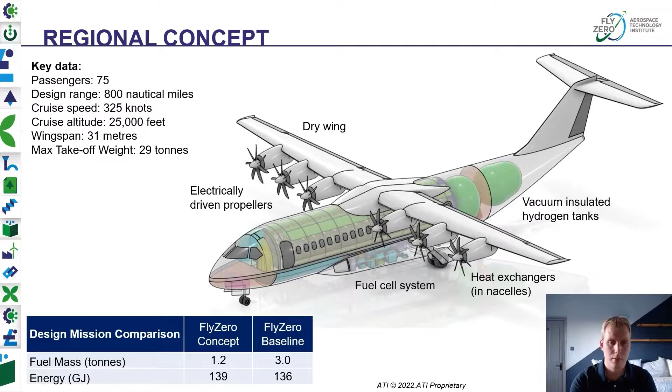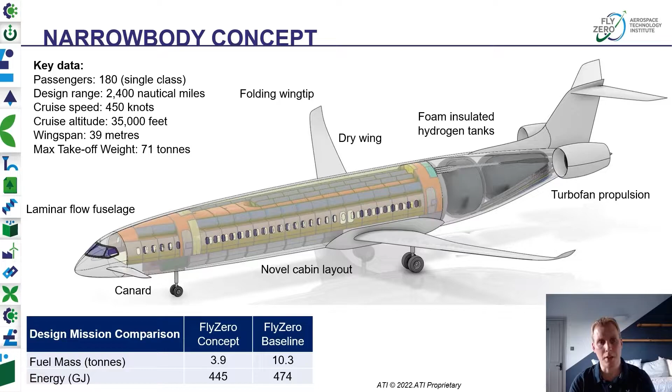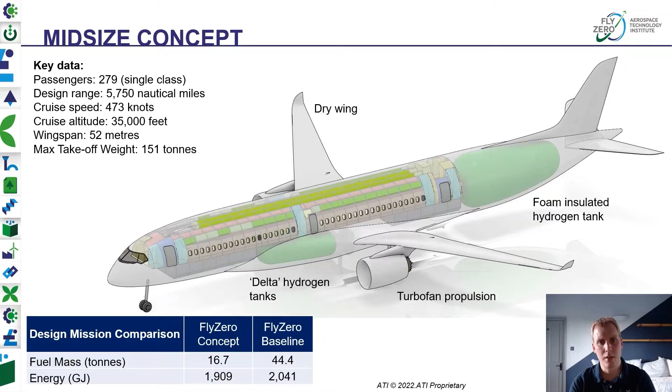So in terms of the conclusions, what have we learned from this concept activity? Well, as I said earlier, the concepts are 3 possible solutions that the FlyZero project has come up with.

The hydrogen storage dominates the choice of architecture. Where do you put various systems? You start with the hydrogen storage because of the volume challenge that's associated with hydrogen.

We've discovered that flight operations with hydrogen are fundamentally different. The shape of the payload range diagram, the ability to trade fuel for range, which is a given on kerosene aircraft and something we're all used to, doesn't exist in the same way.

The concepts are based on the FlyZero technology projections, and we should note that they are therefore sensitive to changes in things like the efficiency of the hydrogen storage.

Safety is another critical consideration. We've designed these concepts using FlyZero design principles which were derived by the project, things like we have to keep the hydrogen storage outside of the uncontained engine rotor failure zones.

Currently, the hydrogen regulations don't exist that would be needed to bring one of these aircraft into service. Global cooperation is going to be needed on this. This represents an excellent opportunity for the UK CAA to re-establish itself as a global player in the regulation space.

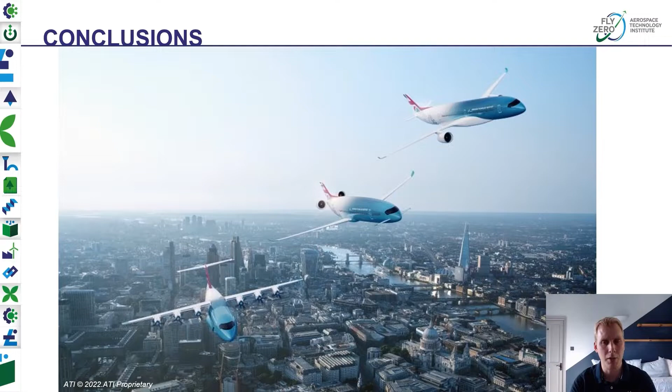Hello, I'm Simon Webb and I'm the Chief Engineer for Propulsion on FlyZero, and I'm going to give you an overview of the technology options and challenges we've been working on over the last year.

So firstly, as I explained in the last webinar, and as we've now documented in our zero carbon fuel comparison paper, we've down selected to liquid hydrogen as the preferred fuel for zero carbon flight. The main driver here is that as well as producing no CO2, hydrogen is very light. It's around 3 times more energy dense than kerosene, which is a key dominating factor for aerospace.

However, when it's a gas, it's very large. It has low volumetric density. This does improve when it's liquefied.

However, this presents a key first challenge in that hydrogen is only liquid at very low temperatures, at around minus 253 Celsius or 20 Kelvin. So significant work is needed to create a cryogenic tank and fuel delivery system to be able to make this viable for aerospace.

Hydrogen is also a very small and energetic substance, so there's additional challenges around sealing at joints, leakage, and potential permeation over time into materials.

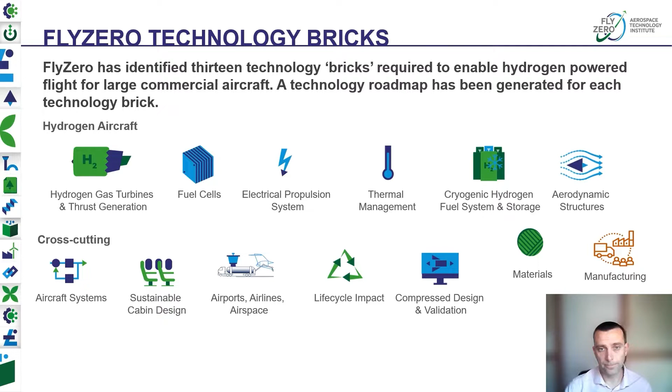We put these technologies into our FlyZero concepts, as was talked about earlier, and have been considering what would need to happen in order to make these viable in the future.

On aerodynamic structures, there's a continued need to look at increasing the efficiency whilst reducing the mass of these structures. For example, in developing efficient, lightweight dry wings, as the cryogenic fuel will no longer be stored in the wings. The fuel will be stored in the fuselage, as these tanks need to be large and ideally as close to spherical as is practical in order to keep them lightweight from a structural and thermal sizing point of view.

Also, making these tanks from composites in the future could offer a significant advantage, so we think this is an area to look into and develop further.

There are significant new challenges with a cryogenic fuel delivery system. We've looked at knowledge from other industries, such as the space industry, but there are many different requirements for aerospace, particularly around the conditions that the fuel would be stored at, the requirements through life, the manufacturing rate and life cycle cost that aerospace requirements present.

Gas turbine technology looks attractive, and so we're advocating investment in this area in the future, particularly around the combustion system and the development of a fuel delivery system with heat exchangers within the gas turbine. Our studies show that it would be viable to make a hydrogen gas turbine more efficient and produce less NOx

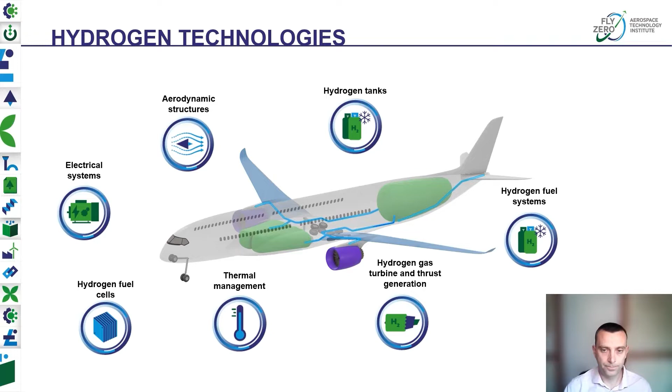So I talked about what would be needed to introduce liquid hydrogen fueled flight. This, however, would clearly require a new clean sheet aircraft design and significant investment in the ground infrastructure to go alongside that. So we're advocating multiple routes to decarbonise aviation in the future.

Including liquid hydrogen, but also continuing to look at the production and use of sustainable aviation fuels from existing feedstocks, biofeedstocks, waste feedstocks of greases, oils in the future. But looking long term at the scalable solution of power to liquid SAF.

So using hydrogen and CO2 extracted out of the atmosphere, going through a Fischer-Tropsch process to produce that fuel with increasing blends with kerosene. This would require investment in the today relatively immature direct air capture of CO2 from the atmosphere, and that would need to be scaled up and made economic.

We need to continue to invest in improving aircraft efficiency, both in terms of making it lightweight and the fuel efficiency of future aircraft. Across different fuel options, kerosene, SAF and hydrogen, for different reasons, we think there's a significant risk the cost of producing these fuels and the price of these fuels ultimately will increase in the future.

We also think there's a place for improving flight path management in terms of making flights efficient, minimizing waiting times, etc. But also from a sustainability point of view, progressing the technology in weather path predictions, and so minimizing the time over which flights would travel through supersaturated regions where persistent contrails are at a higher risk of being formed.

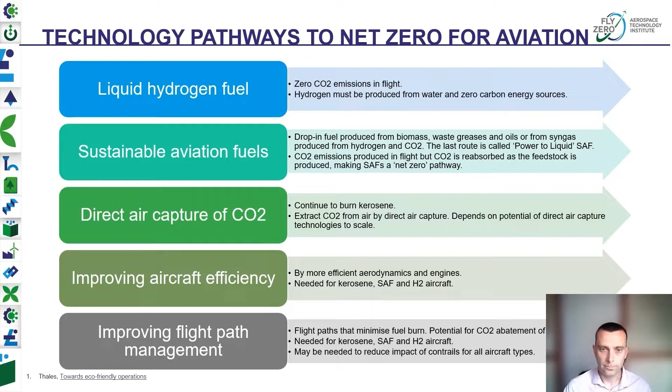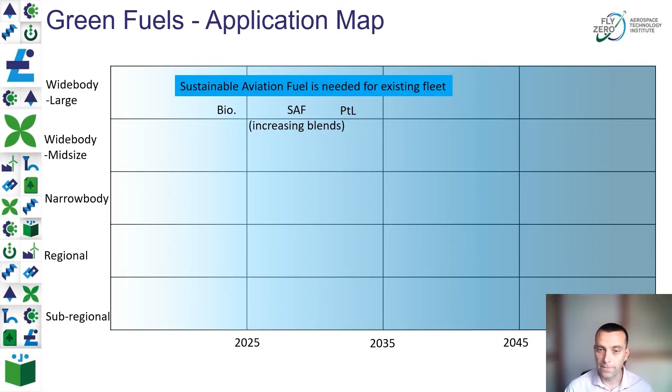So looking forward at where green fuels could help decarbonise aviation across time and across the different capability spaces, there's definitely a place for sustainable aviation fuels, and that will be needed for the existing fleet with increasing blends going forward. But alongside that, we believe there's a space for electric battery powered flight at the shorter, smaller range aircraft,

and then going up to, in the medium term, gaseous hydrogen fueled flight, and then building up to long term as you need to go further and will want to have larger aircraft flying with green fuels, moving towards liquid hydrogen. This will, however, require significant investment in onboard technology and in ground-based infrastructure in producing the fuel and around airports.

If early flights happen with gaseous hydrogen, we think that would be a great starter in terms of starting the conversation with airports around handling hydrogen as a fuel, and with the authorities around the suitability of regulations and certification criteria and acceptable means of compliance, and driving that conversation forward for the long-term move towards liquid hydrogen as a

fuel. And as a new fleet is introduced, we think strategically liquid hydrogen will be the best option for the vast majority of the aircraft sectors. Fuel costs will drive it that way, and the need to have an improving aircraft capability.

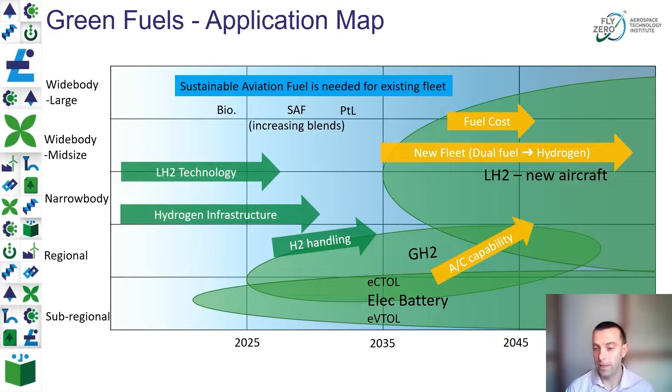Overall, we think there's a place for power-to-liquid SAF and liquid hydrogen, and that these together can address the vast majority of the market, and that liquid hydrogen as a fuel has the potential to be energy efficient and a relatively economic fuel.

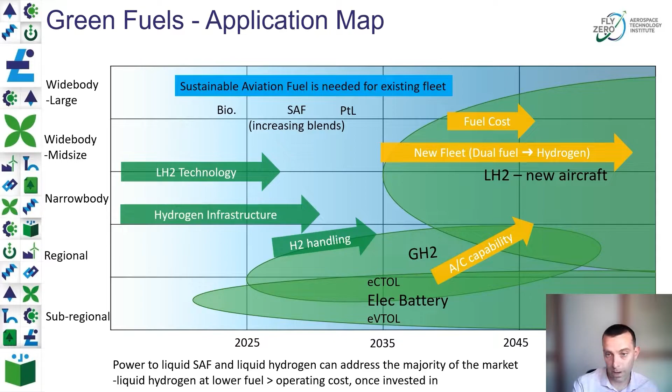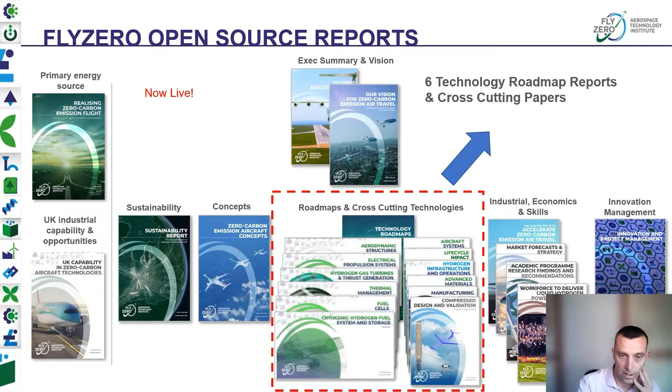So if you'd like to know more, the ATI website with the FlyZero reports is now live. Feel free to go and look at these technology roadmaps, the cross-cutting papers, and all of these other reports that are now going live on the website. Here's an example of one of the technology roadmaps to show you how these will look and feel, and what level of detail would go into these.

We'll have several of these roadmaps throughout these reports, and the target here is to drive action to have technology ready to be committed into a new aircraft in 2025, to take that forward and be developed through a development program ready to go into service in the 2030s.

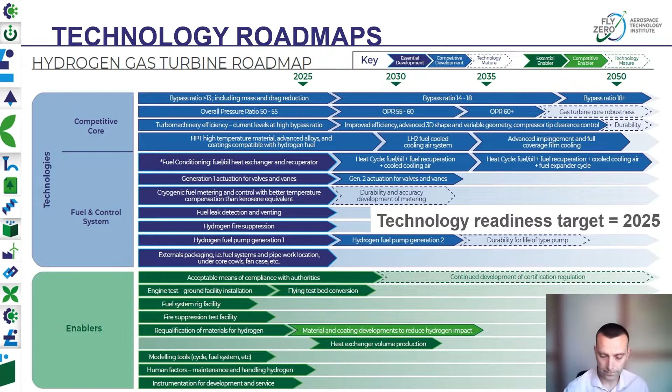So to summarise, green liquid hydrogen presents a pathway to decarbonise aviation. We believe it's a preferred fuel for aerospace because it's relatively energy dense, and this is important. It's relatively energy efficient to produce, so this makes it economic, and will also reduce the carbon footprint of the full value chain of producing the fuel and using it on board, minimising the demand on the green power generation network in the future.

This presents a step change for technology in terms of development of and maturing these new technologies. So significant investment and action is needed.

In FlyZero, we've assessed and studied the technology challenges here. We've seen no hard blockers, but we recognise substantial investment and action throughout industry and the research network is required to make this real. The UK needs to accelerate to keep pace with what's happening around the globe, and needs to collaborate. No one country, no one company can do this on their own. So we need to work together for the good of the industry and the planet.

FlyZero is now publishing our technology roadmaps and reports. If you'd like to know more, go on the ATI website, look at those roadmaps and reports. Also, if you're particularly interested in the technology, look out on the 22nd and 23rd of March for these technology talks. Please register, sign up and join these sessions to learn more.

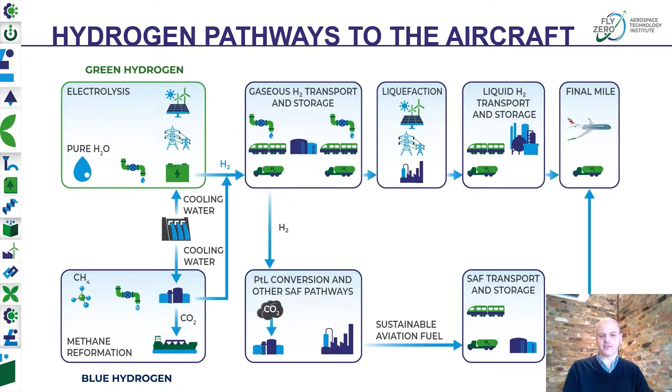So we identified and assessed three main pathways for hydrogen supply to airports and aircraft. In scenario 1, hydrogen is generated off-site, most likely close to sources of renewable energy and other industrial hydrogen users. Hydrogen is also liquefied off-site before being transported to the airport in tankers as liquid hydrogen and then stored on site at the airport. In the second scenario, hydrogen is still generated off-site in similar locations to scenario 1.

However, instead of being transported as a liquid in tankers, it's delivered as a gas via a pipeline. Once on the airport, the gaseous hydrogen is liquefied on site. And finally, in the third scenario, both electrolysis and liquefaction are carried out on the airport, with the airport only needing to be supplied with electricity and water to generate the hydrogen.

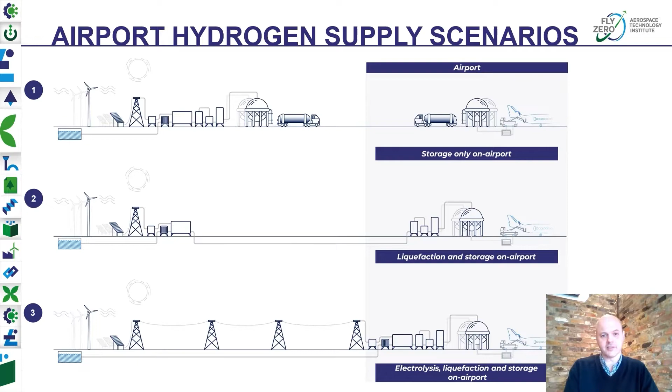As we start to look at these in more detail, through undertaking case studies at UK airports, we've evaluated which scenarios would be the most appropriate for airports of varying sizes. In the early years of hydrogen adoption, most airports would be likely to adopt tanker deliveries, as shown in scenario 1, as this requires the least capital investment and is relatively easy to scale as demand grows.

However, as the demand grows further, particularly at large airports, the logistics of tanker deliveries could become a challenge. For example, at large airports, our studies have shown that by 2050, nearly 500 tanker deliveries a day could be needed.

At these levels, we expect scenario 2 to become far more attractive, requiring a gaseous hydrogen pipeline and on-site liquefaction. Although this requires significant energy, in the context of the overall energy transformation required by 2050, this may be achievable. However, with the exception of very small airports with low demand but plenty of renewable energy, we're not expecting scenario 3 with its on-site electrolysis to be a preferred option.

For example, for a large hub airport, our studies showed that electrical demands could be well over 4 gigawatts by the year 2050.

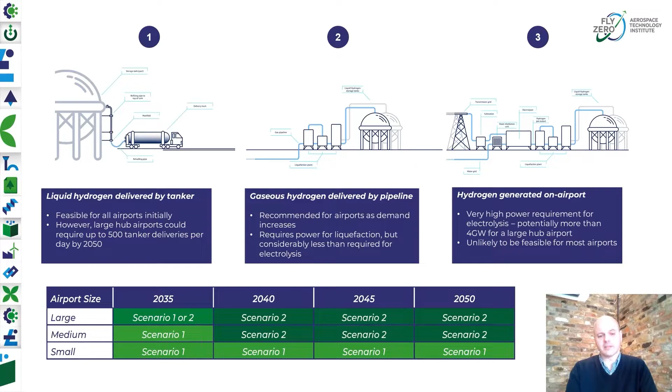So as well as the supply to the airport, we also evaluated the on-airport distribution of liquid hydrogen to the aircraft. Similarly to the supply of hydrogen to the airport, we expect that refuelling using mobile bowsers will be the most likely solution at low demand levels and for small airports on an ongoing basis. Although similar to existing bowser refuelling using kerosene, the operation would, however, be more challenging due to the requirements of maintaining the cryogenic temperatures.

As demand levels increase, airports may need to consider hydrogen refuelling systems to avoid an unmanageable bowser operation. Like the supply to the airport, the need to move away from tankers and bowsers may come sooner for hydrogen operations due to the increased volume of liquid hydrogen required when compared with kerosene.

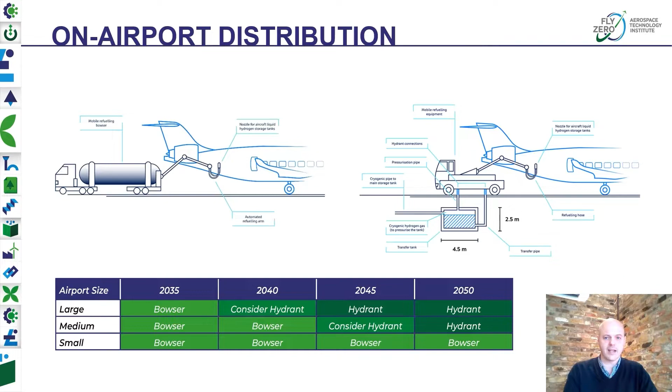The hydrant system may be similar in layout to a conventional fuel hydrant system. However, to keep hydrogen as a liquid will require cryogenic pipelines and a far more complex overall system, potentially including liquid hydrogen transfer tanks located on or underneath the apron stands.

So after looking at the supply of hydrogen to the aircraft, we then also investigated the potential impact of hydrogen refuelling on the speed of the aircraft turnaround at the airport. For airlines, the fast turnaround of aircraft is essential to achieve high utilisation and a commercially viable schedule. To maintain very fast turnarounds, often refuelling takes place simultaneously with other aircraft servicing activities.

However, due to the uncertainty of refuelling with liquid hydrogen, there's a possibility that no other activities can take place while refuelling is also being carried out. The chart on this slide shows, for each of the FlyZero concept aircraft, how the turnaround times will compare with turnaround times for similar current aircraft.

For each concept aircraft type, shown in a different colour, the column to the left of each shows how long a turnaround could take if no simultaneous activities are allowed during refuelling. In each case, you can see that this exceeds the current minimum turnaround times, which are reflected by the grey bar.

The second column for each aircraft shows that if some activities do take place simultaneously, the turnaround is close to that of the existing aircraft, albeit still slightly longer. The final column for each aircraft shows that with simultaneous refuelling, it may be possible to match current turnaround times.

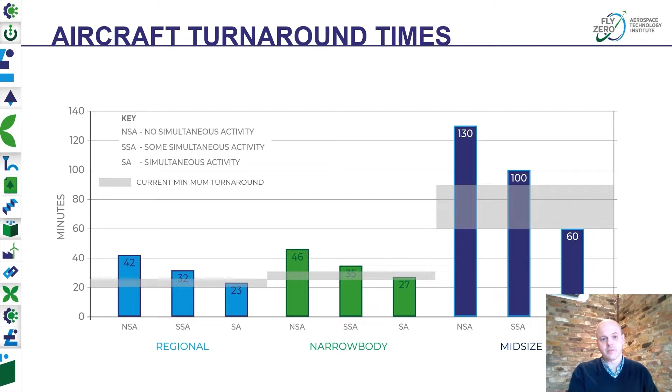So using the narrow-body aircraft as an example in green, with no simultaneous activities, in this scenario, which is based on a set hose size and refuelling velocity, the estimated minimum turnaround time is shown as 46 minutes. If some simultaneous activities are allowed, this is reduced to 35 minutes. And when there's no restriction, then the minimum turnaround time could be reduced to 27 minutes.

The reason for this concern over whether simultaneous activities can take place is due to the potential for much larger refuelling safety zones. Current refuelling with kerosene requires a 3-metre safety zone, which allows for most other activities to take place at the same time, whereas with hydrogen refuelling, this safety zone could be much larger.

However, studies for FlyZero by the HSE have indicated that while a 20-metre safety zone may be required during connection and disconnection of fuel hoses, it might also be possible to reduce this zone to 8 metres during the refuelling process. This would allow some simultaneous activities to take place.

To further reduce the impact of the increased safety zone, it's also anticipated that some of the turnaround activities would need to be automated to reduce the risk to individuals. In addition, refuelling hoses for hydrogen are likely to be larger and heavier due to their insulation materials. Therefore, some level of automation of the refuelling process may also be required. But subject to further analysis, through process changes and automation, we think that the overall turnaround time may remain broadly similar to the current process.

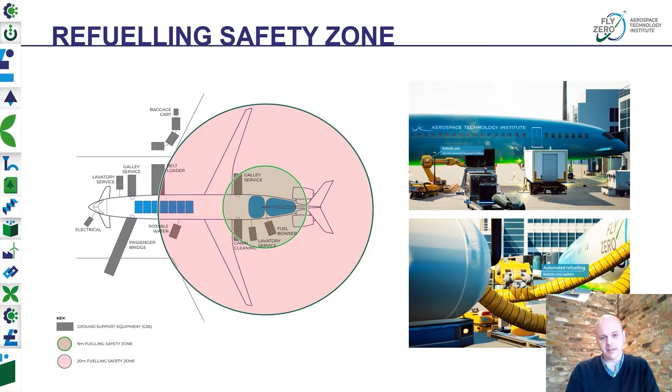As well as the aircraft's operation on the ground, FlyZero has also investigated air traffic management operations to understand the ability of ATM to support and enable zero carbon emission aircraft. An important finding so far has been that the current FlyZero concepts have similar airspace requirements to existing aircraft and don't display any attributes preventing them from integrating within the ATM system. However, regardless of hydrogen aircraft, changes are needed in how airspace operates. Without changes to airspace, the current system will be unlikely to cope with forecasted traffic volumes in the coming decades.

There are various solutions proposed to introduce technological and operational changes. By 2050, these improvements are estimated to improve flight efficiency and reduce CO2 emissions by 6 to 10%. But importantly, focusing on the hydrogen aircraft, these same changes will reduce the requirement for liquid hydrogen and the corresponding energy to produce it.

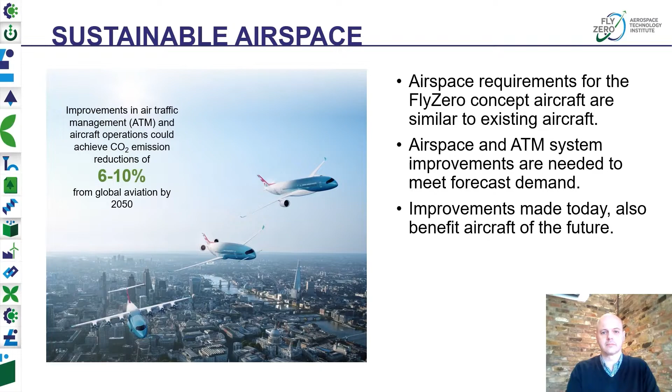To help improve flight efficiency, and therefore reduce the demand for fuel and eventually hydrogen, typical measures include optimizing flight paths in free route airspace, optimizing processes such as collaborative decision making between airspace managers, airport operators and airlines, and optimizing technologies and concepts such as high resolution weather data for headwind and contrail avoidance, and formation flying. While each initiative alone may have a small impact, the sum of these marginal gains can provide much more significant benefits overall. Understanding these gains and facilitating their implementation will be an important step towards shaping more efficient airspace, ready for future hydrogen aircraft.

Although these slides have only given a very brief introduction to some of our work for FlyZero, more information is included in our report, Hydrogen Infrastructure and Operations, which is available on the ATI website.

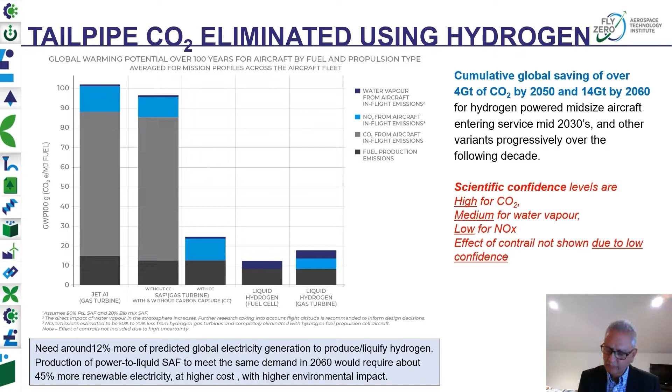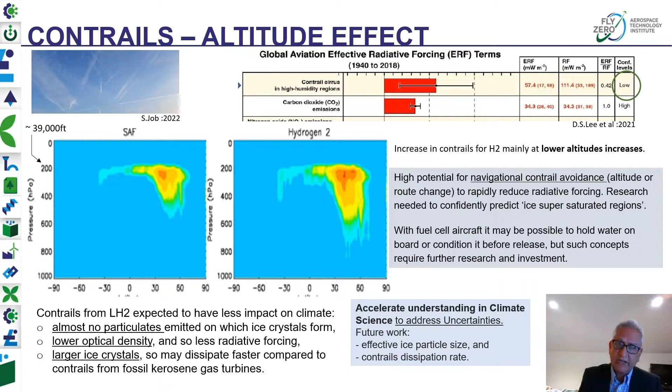To complete the picture, we also looked at other non-CO2 effects. On oxides of nitrogen, we estimate that this will be 50 to 70% less for hydrogen-powered gas turbines compared to today's technology, and fuel cells don't produce any NOx. Regarding particulates, because there's no carbon in the hydrogen fuel, there won't be any soot, but we may get a very small amount of trace lubricating oil seeping from engine seals, which might generate some particulates. Regarding sulfur, there won't be any oxides of sulfur, which today comes from the sulfur that exists in the Jet A1 when that is processed.

Now, earlier I mentioned that hydrogen combustion will produce 2.6 times the amount of water in the exhaust. So we've also looked at the direct impact of water vapor, which can act as a greenhouse gas. This is important in the stratosphere, above the tropopause, where large commercial aircraft will fly into, particularly during winter months when the tropopause is lower down. The good news is that FlyZero concept aircraft are anticipated to fly at the same altitude or slightly less than current aircraft. The total climate impact from this water vapor is around 2% of the 2 to 3.5% of total aviation impact. But even so, further research is recommended here also.

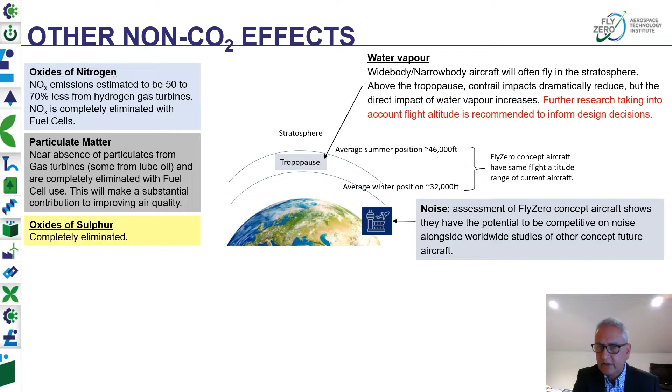Now, on noise, our work with Southampton University indicates that FlyZero concepts will be competitive on noise compared to other future aircraft, and will be able to meet the next global noise standard following Chapter 14. That's good news.

Finally, as part of the full life cycle analysis, we also looked at the environmental impact resulting from materials, manufacturing, and the maintenance of aircraft. Although this is around 1% of the impact relative to emissions from the use of the aircraft in service, we wanted to make sure that we identify opportunities where the carbon footprint may be further reduced in the future.

FlyZero concepts will require new and novel materials and processes. So it's important that productionization and supply chains build best practices to improve circularity for new technologies such as cryogenics, fuel cells, and the like that will be needed for the next generation of aircraft. This is recommended through deploying design for sustainability methods, all the way from raw materials through to end of life.

By the way, a comprehensive list of materials and processes are covered in our reports, including work we did with Strathclyde University on this important topic.

So, to wrap up, our work on CO2 and non-CO2, backed up with a full life cycle analysis, gives us confidence that the use of hydrogen on the proposed FlyZero concept aircraft can help to truly decarbonize aviation. The sooner this is done, the sooner we can realize significant CO2 reductions and thereby contribute to not only the UK net zero goal for 2050, but all across the globe.

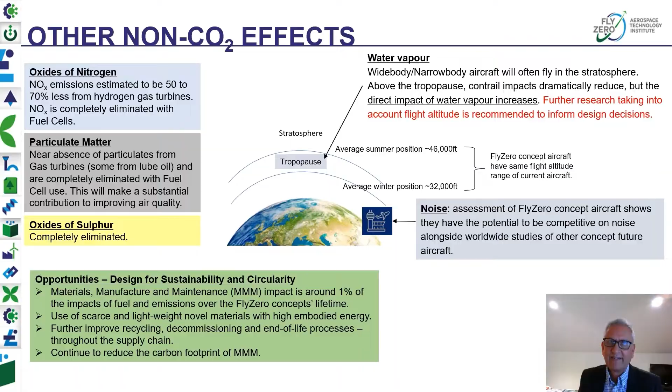Good afternoon. My name is Mark Howard, and I have had the pleasure of heading up the commercial strategy team for the FlyZero project. I'd like to take you through a whistle-stop tour of our market forecast, the options for exploitation of zero carbon aerospace technology, and a view of the economic reasons for acting.

FlyZero has undertaken a detailed market study and determined a global market forecast. The baseline forecast broadly matches that of Airbus and Boeing, issued in Q4 2021. But we've also taken an additional, more conservative view, looking to account for an incomplete recovery from the COVID pandemic.

This more conservative view actually aligns well to the Oxford Economics analysis, which was undertaken by IATA, and in summary, delays the market by approximately 5 years. However, all of the market forecasts show a market that is due to more than double over the next 20 years.

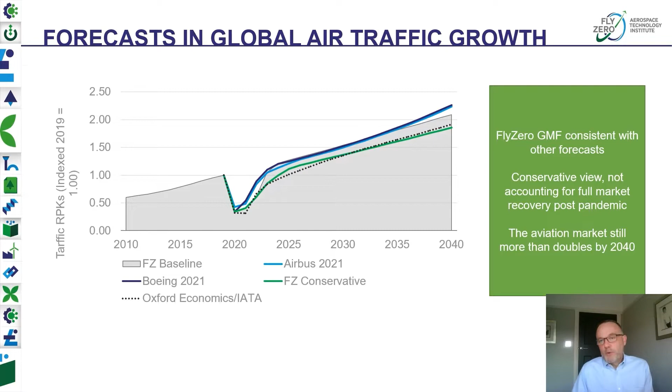For the market forecast, we've broken the market down fairly traditionally, but provided a distinction for the mid-size aircraft as a 200 to 300 seat wide-body aircraft with a scheduled sector distance of up to 5,250 nautical miles. The narrow-body, mid-size and wide-body segments collectively accounted for 93% of CO2 emissions in 2019 and are projected to account for 96% of CO2 emissions from aviation in 2050.

Now, the aviation sector emitted 920 megatons of CO2 in 2019. And if we do not act with zero carbon emissions aircraft or high volumes of sustainable aviation fuels and direct air capture of CO2, this will grow to 1,540 megatons of CO2 in 2050.

So let's put this into context for the UK. Assume that other CO2 emitting sectors act and aviation doesn't. Aviation is likely to account for 39% of the UK CO2 emissions in 2050, which will not be acceptable socially, nor, we believe, economically, as restricting aviation will hold back the economy.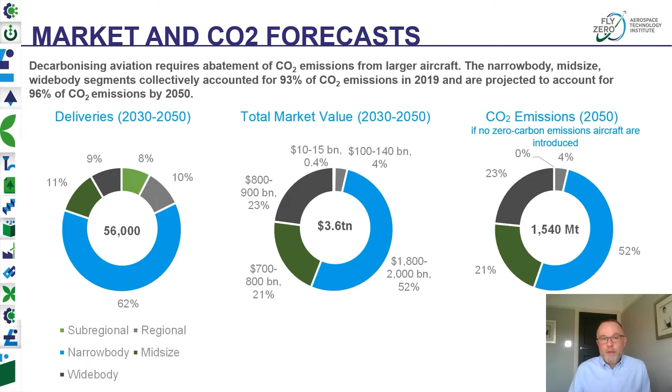Whilst the project was not asked to look at sustainable aviation fuels or SAFs, one of our primary considerations was to assess the future cost of fuel to enable an understanding of the operating economics. This has to be considered on a dollars per megajoule of stored energy basis, as liquid hydrogen is 3 times lighter than kerosene. And in the graph, we've aimed to normalise this to equate to an equivalent ton of kerosene. We've essentially taken many external studies to compare green liquid hydrogen against a blend of many forms of SAF.

All of these studies take differing but similar assumptions around volumes of available SAF over time, with biomass representing 30 to 40% of demand but maximising out by 2040, and there are aggressive forecasts of PTL maybe achieving 50 to 60% of capacity by 2050. So we've adopted a blend of the different forms of SAF as they become available, and of course taxed kerosene, to develop our integrated cost forecast.

We have used carbon taxation forecasts from the Department for Business, Energy and Industrial Strategy, but we believe that the industry can expect to have carbon taxation applied on a more global basis. There could be a good solution here if the tax generated was used to support investments into the sector to accelerate the availability of technology and ultimately zero carbon aircraft and the required supporting infrastructure.

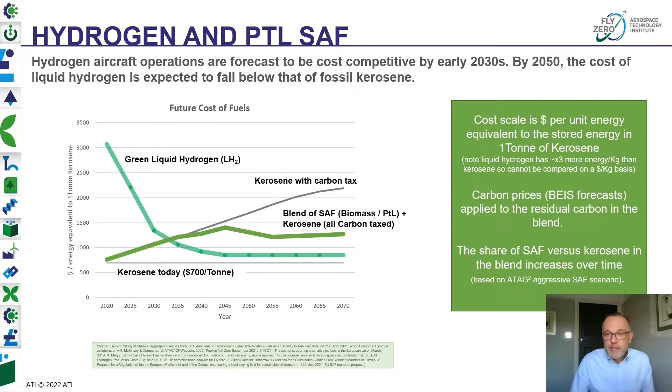From this assessment, we've concluded that the cost transition for liquid hydrogen to be cheaper than a combination of taxed kerosene and proportionally taxed SAF is around mid-2030s. To assess how good the FlyZero aircraft concepts are, we have compared energy demands to achieve typical sector missions against current conventional hydrocarbon aircraft and against an equivalent new clean sheet design SAF burning aircraft. This chart is showing the narrow body comparisons.

The FlyZero hydrogen gas turbine powered narrow body concept, or FZN, we believe is on par with a clean sheet SAF burning new single aisle. The trip fuel costs are expected to be cheaper than that NSA aircraft by 2040. And even when we start to account for the additional maintenance costs associated with the more complex system and new systems that the cryogenics bring, we found that the direct operating costs per RPK, per revenue passenger kilometre, are also less for the hydrogen aircraft. The conclusion that we've drawn is that the operating economics of these hydrogen aircraft are both attractive and superior and will help the market penetration.

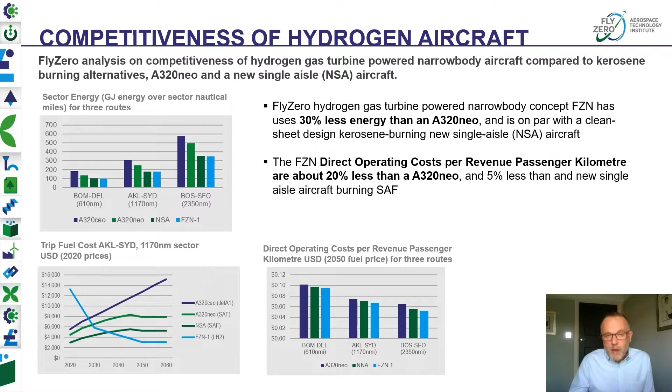We have looked at a number of market entry scenarios. Our view has been that the narrow body fleet are cash cows for the OEMs, so we suspect that these aircraft will more likely follow a lead aircraft that proves the market attractiveness. Consequently, we are sharing two of the scenarios we've considered. The first being an ambitious mid-size first strategy, seeing a mid-size type aircraft enter into service in the early 2030s to de-risk the technology introduction, which would then quickly be followed by a narrow body adopting downscaled technology from the mid-size, and we believe that the market penetration could be really quite significant.

In the second scenario, which we've described as the regional first approach, there is more likelihood of a conventional narrow body to be launched around 2030, which would delay a hydrogen narrow body for a generation. In this instance, the market would demand a large amount of SAF and actually large amounts of PTL SAF by 2050 to meet the net zero targets.

Our challenge to the aerospace sector is therefore to be bold. We believe that large civil aircraft should be the priority, and they will abate more carbon dioxide per flight; leading with a mid-size aircraft will have the greatest positive effect on CO2 emissions. We collectively need to ensure that all actors step up, global industry, global governments, and collectively look to accelerate the delivery of zero carbon aircraft, this acceleration making flying ever more affordable and ever more green.

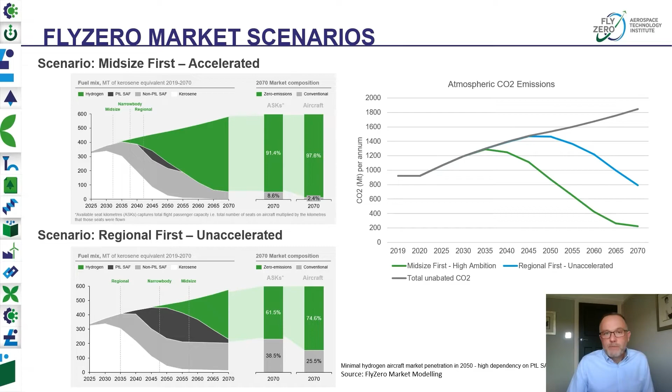But let's be honest, introducing hydrogen aircraft is not going to be easy. The industry has a significant coordination challenge to overcome. There's not only the generation of green electricity, but also the generation of the hydrogen distribution infrastructure to get it to the point of use. And then, of course, we need to be able to convert a number of airports to be hydrogen ready, on top of the global OEMs developing and producing the aircraft, carefully introducing them into the fleet without damaging the cash cows that keep the OEMs in business today. But we believe the prize is great.

From this chart, to tackle emissions, we need to focus on large civil aircraft. To address the infrastructure conversion, the mid-size aircraft would demand the least, but require significant global coordination, ultimately acting as feeders for narrow-body introduction that would naturally follow. Ultimately, we need to look to international collaboration to achieve the goal of decarbonisation. And this is not just for the aerospace sector. We have a coordination and collaboration challenge across energy, aerospace, and aviation.

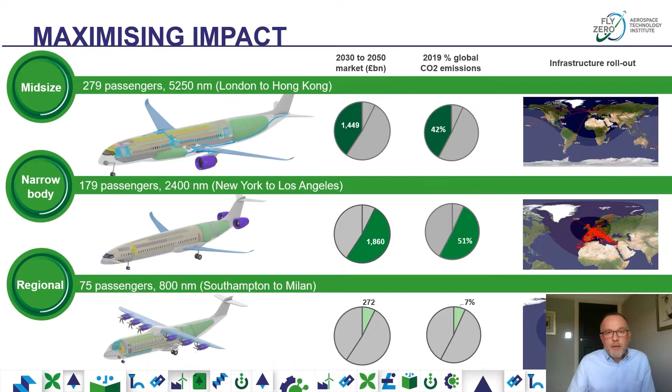And finally, I'd like to try and explain the economic value of investing in decarbonisation. This chart reflects the aviation sector, basically the airlines, the airports, and the airspace management, showing the UK jobs and gross value add that this sector brings to the economy.

The bubble size represents the number of people flying, ultimately the RPKs, revenue passenger kilometres. The bubbles depict each of the FlyZero scenarios, the mid-size first and the regional first, but also a Jet Zero consultation scenario, which effectively reflects a quantity of 5% SAF in the fuel mix by 2050.

With market-based measures ultimately restricting aviation to keep CO2 emissions down. We believe that the more people fly, the better it is for the economy. This is true for any economy. Aviation connects people, it brings social benefits, economic business, tourism, and we've seen from the forecast growth that people want to fly. It just won't be at any cost.

So these market-based measures that restrict flying are represented by this continuation of current trend scenario. And that ultimately shows that restricting aviation to reduce emissions does not come without a cost to the economy. The reduced RPKs, revenue passenger kilometres, result in less jobs and GVA. It is therefore not free decarbonisation.

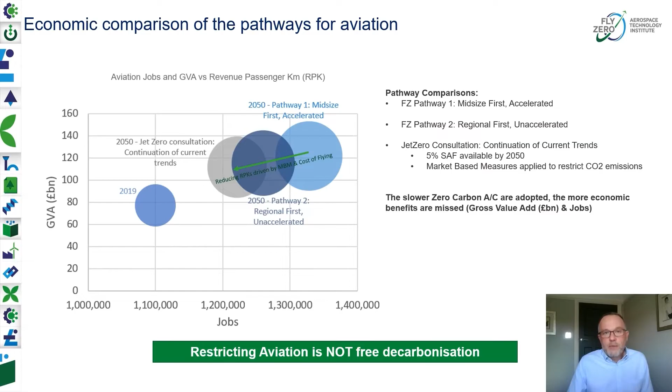Hello, my name's Katie Milne and I'm Head of Industrial Strategy on FlyZero. I've been working for the last year with a brilliant team of people from across industry on the UK capability in hydrogen aerospace technology and what action we need to take. I have technologists in my team looking at manufacturing, materials, and component design and validation, and they've put out papers alongside the technology roadmaps. But today I'm going to focus on capability and actions.

Simon Webb showed this slide earlier. It shows the hydrogen aerospace technologies that need to be developed in order to realise hydrogen fuel cell electric and hydrogen gas turbine aircraft. The UK has world-leading competency in aerodynamic structures and wings, in thermal management and heat exchangers, gas turbines and thrust generation, and fuel systems. However, it has a big gap in terms of cryogenics and hydrogen behaviour that it really needs to address and build capability in order to develop these types of technologies.

The UK is also extremely competitive on electrical systems. Both the incumbent aerospace players are building electrical capability very rapidly, but also companies who've been looking at automotive, developing electric motors for example for the automotive sector, are now beginning to look towards the aerospace sector. And electrical is relevant for any future aircraft, whether it's powered by future sustainable aviation fuels, drop-in alternatives to kerosene, or by hydrogen. And so this is an area which the UK should really concentrate on.

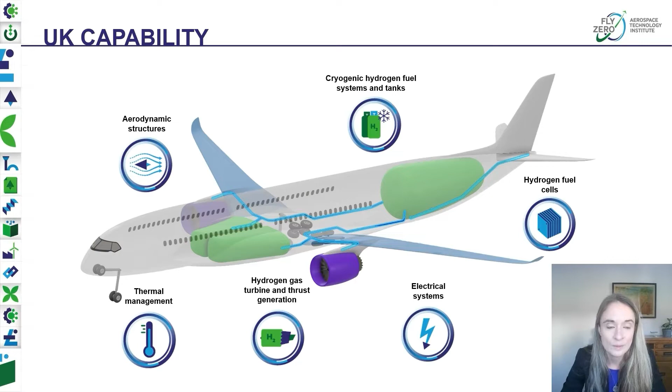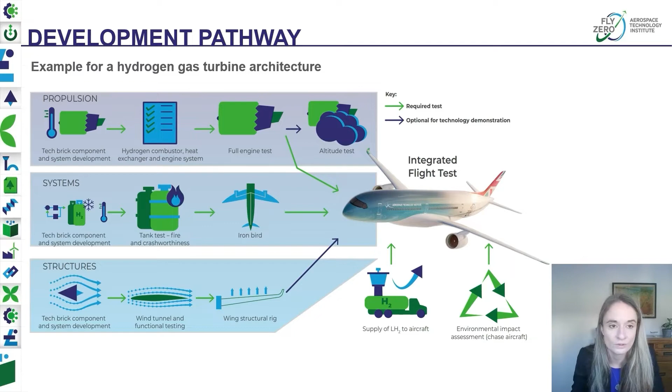And that will be at the system level, at the aircraft level. We'll need tests of emissions in flight, and at the system level, we'll need tests of refueling. And if the UK builds that capability, it will help accelerate our industrial players, but it will also help with collaboration, as companies around the world would want to work with us and to use that infrastructure.

We believe the window of opportunity is short. If we assume that the larger aircraft are going to come into service in the mid-2030s, and that the smaller hydrogen electric aircraft could potentially be even earlier than that.

Some of the players are targeting the mid to late 2020s. If we take into account the lead time on that aircraft development program, and that for the program to launch, they need all that critical technology to already be demonstrated as mature in a representative environment, so at technology readiness level 6, working from right to left, we need to achieve technology readiness level 6 by around 2025. That gives the UK a very short 3-year window of opportunity to move and develop these new solutions.

In the most pessimistic scenario, we do not move, but hydrogen aircraft come to market. That is a failure to act, and we believe that by 2050 the UK aerospace sector could then be in decline. This assumes hydrogen aircraft do come to market, but we believe on FlyZero they're highly feasible. So if other countries break through and we're not with them, hydrogen aircraft will be increasingly winning market share and UK aerospace will not be in it.

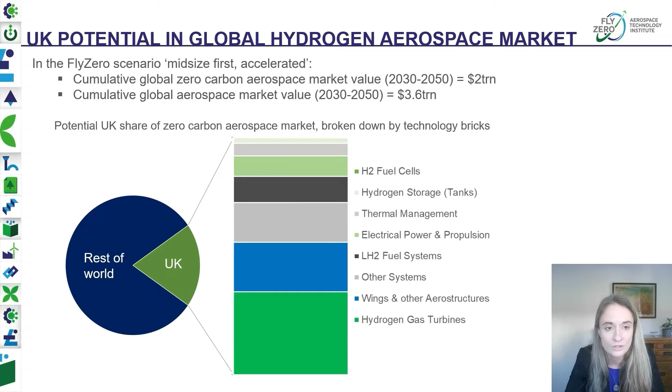International players are moving rapidly. For hydrogen gas turbine aircraft, Airbus has announced its ZeroE programme, collaborating with CFM, a collaboration between General Electric Aviation, a US company, and Safran, a French company. The Brazilian company Embraer is exploring concepts in its Energia programme. For hydrogen fuel cell electric aircraft, challenger companies are leading the way, and we have some of those in the UK: ZeroAvia, Cranfield Aerospace Solutions, and GKN Aerospace on their H2 Gear programme.